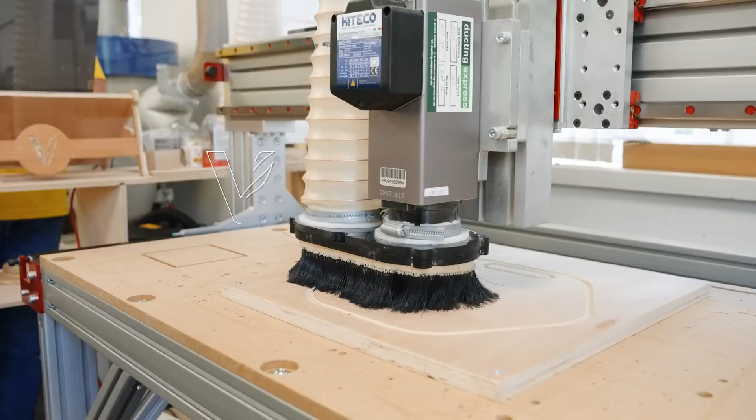For this project, I'm going to use Cut2D Desktop. Now you don't need to use that software for this project. Of course, if you have VCarve or Aspire, you can add all kinds of interesting elements to this. But I want this to be available for any of our core software customers.

Let's not forget that this is going to be a trial-friendly project. So if you're new to Vectric and you haven't purchased our software and you'd like to give it a go, and you think this project is exactly what you'd like to try to cut, then this file will be available for you to open up into the trial version of Cut2D Desktop, Cut2D Pro, VCarve Desktop, VCarve Pro, or Aspire, and you can save off the toolpaths and go ahead and cut them.

Another thing I want to say ahead of time: I'm going to give you 3 different files. You're going to have one set up for millimeters, based on 18 millimeter plywood. I'll give you another set up for 3/4 inch plywood, so you don't need to edit too much if you've got that on hand. And then I'll give you a plain file without me taking into consideration the thickness of your material, so you can edit that based on whatever you have kicking around the shop.

Unfortunately, just the first 2 files will actually work well with your trial version of the software, where the third one is more for people who have our full version, so you can go ahead and edit anything you want to. Okay, let's get that out of the way.

So here I have a fresh Cut2D Desktop open. Now, before we get too much farther, full disclosure: I've already pre-cut a sample of this. This was my original design that I was hoping would work out, and I could literally just copy it and give you guys the file. But I made some mistakes, and it was good that I made those mistakes so that I can point them out to you. First thing that's really important when it comes to a slot together project...

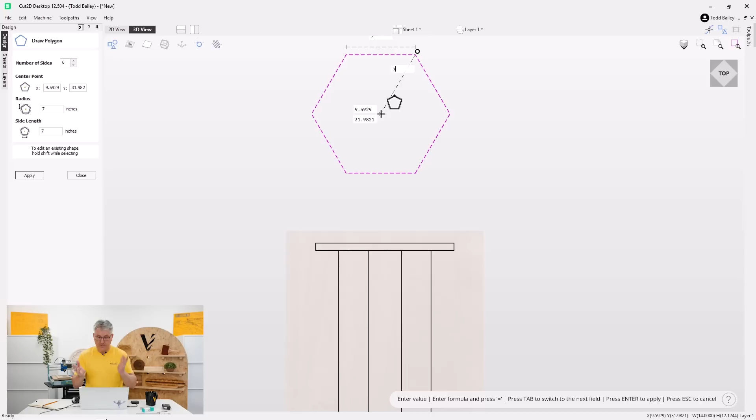Also, you'll see that we have those fields ready for you to type into. So if you didn't want to have that dialogue on the left-hand side already pre-filled out, then you can just do it here. So I could change this to be 6 if I wanted it to be, or I could change it to be 7, which I'm going to leave it at 7, and then just press enter, press escape, and there now I have that, and I can move that down to where I want it to be.

And we're just going to then center that left to right in my job so everything lines up perfectly. That looks good. Very happy with that. The next thing I want to do is think about the top of my stool. I don't like those real sharp corners on it. So one of the neat new features of version 12.5 is that we can create fillets right in our 3D view. So we're going to zoom in a little bit so we can see that.

Go over to my fillet tool. And without doing a whole lot in my dialog over here, I'm just going to hover over the corners that I'd like to add in a fillet. And if we zoom in with those current settings that we have, you'll see that it's going to show me what that fillet's going to look like even before I decide to go ahead and accept that change. I can go ahead now and click the normal fillet.

And once I've done that, then I can go ahead and use my arrow keys to go through the different fillet shapes. And as you see, the cursor will change as I go to be whatever fillet is chosen over here on the right-hand side, which is a really handy indication of what we're going to do. So let's go back to a normal fillet, and we are going to go ahead and hold down my left mouse button, and I'm going to drag it in.

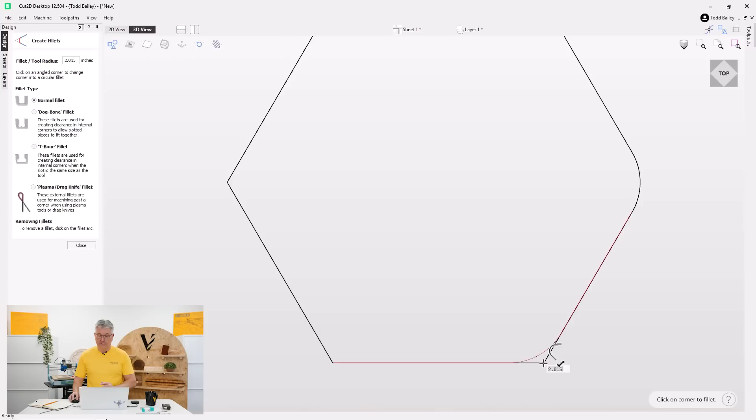And you'll see that now I can drag some arbitrary number shape that I want. So let's make this around 2 inches maybe. And once I'm happy with that, I can let go of my mouse. And that's great. And you'll see that my form is updated with that new dimension. So now I can just go ahead and click all of these corners that I'd like to have, and it will just go ahead and apply that fillet to those corners, and I'll get a nice round top.

Okay, so I'm happy with that. We can close that down. Everything looks really good there. Something to keep in mind that's important is now I need to adjust the width of this rectangle because it's not correct anymore based on the top-down view. And we can see that if I drag in a guideline. Another new thing in version 12.5 is I can put guidelines in my 3D view.

So you'll see that in the 2D view, normally you would drag it in from the rulers that are along the left and the top of your viewing window, but in this case, we need to right-click anywhere in the 3D view, and then we're going to go down to Guidelines, and we're going to insert a vertical guideline, and there it is right there. It's in the 3D view. I can drag it. I can move it back and forth. I can rotate it if I would like to, which is nice. It'll snap if I want to. So we're just going to go ahead and snap that there.

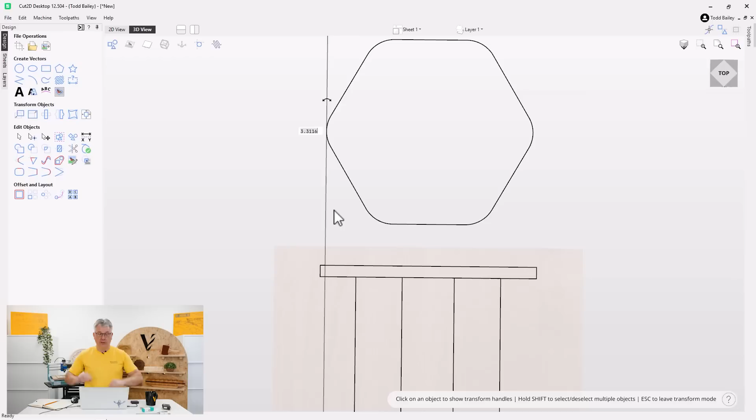And you'll see that the top of our seat actually got a little bit smaller because we've radiused that off. So we want to make sure that our side view is accurate so that we can place our legs in the right spot that we want them to be. So we're going to grab this rectangle, we'll hold down our shift key, and when I hold down my shift key, I can scale it in and out, and I can just go ahead and click that. That's great. Perfect. So now that is the right width of top that I have.

Now let's think a little bit about positioning these legs on our top, where we want them to be. This is totally subjective, and probably it's best that you test it to make sure that it's safe. As I said, I've already got one made, so I kind of have a good idea of where I would like them to be.

In this case, because I have this prototype available to me, I actually want to have these a little bit farther out to the outside edge. Although this is quite safe, and we've used it quite a lot in the office now, I would like to move them a little bit closer to the edge of the circle to give it a little bit more stability.

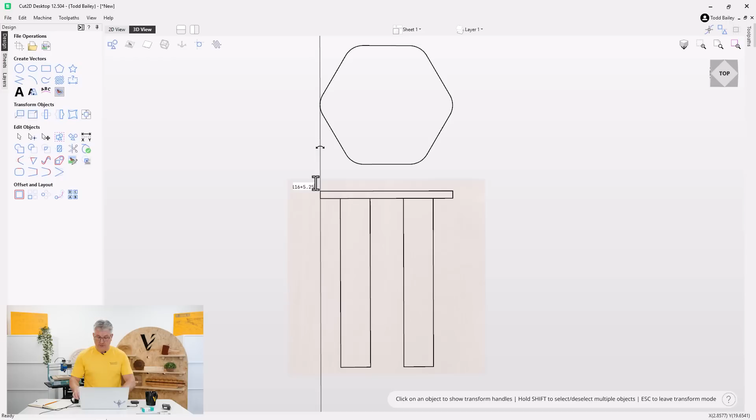So let's do that. What I'm going to do is use this guideline that I already have in place, and I am going to indicate where I like to have the inside of my leg to be. In my case, I think it should be about 5 1/4 inches from the edge of my seat. So if I select that guideline, I go into that field and I add 5.25 and then press equals and then enter. That's going to move that guideline over to where it should be.

That's great. So let's delete out the second leg. Let's zoom in and move this first leg over to where it needs to be. Then we'll zoom back out again and Control Shift and H again to copy that across our job. So Control Shift and H. And there we have where the other leg needs to be.

Now let's think a little bit about the shape of these legs. They look great, straight. Not probably. We want the bottom of them to be as close to the edge as we can, so we've got that nice sort of stability that we talked about. So here's some nice little tips that you can do when you're node editing in the 3D view. I'm going to add in another guideline just for fun here, insert one vertically, and drag it over so that it's there. So I've got a visual reference to where the edge of my stool is.

Now I'm going to grab both of these legs. I'm going to go into node mode, and then press H on my keyboard. As soon as I do that, you'll see there's that purple line down the middle of my job. If I have like nodes selected on both sides of that line, if I move them on one side, it's going to mirror the movement on the other side, which is great. So if I grab these 4 at the bottom and use my cursor keys now, you'll see that it's mirroring those to the other side. That's really nice and easy.

Next thing we want to do is grab all of those nodes, and we're going to turn them into Beziers, okay? And then we're going to grab these top 4, and use our cursor keys again to get us a nice shape at the top. Let's grab these 2 bottom ones, move them out. And there we have it. Nice looking stool legs, I think, to start out with. That looks great. Perfect. So let's go ahead and delete these guidelines out of here. I'm going to select that one and press delete on my keyboard. This one, delete on my keyboard, because I don't need those anymore.

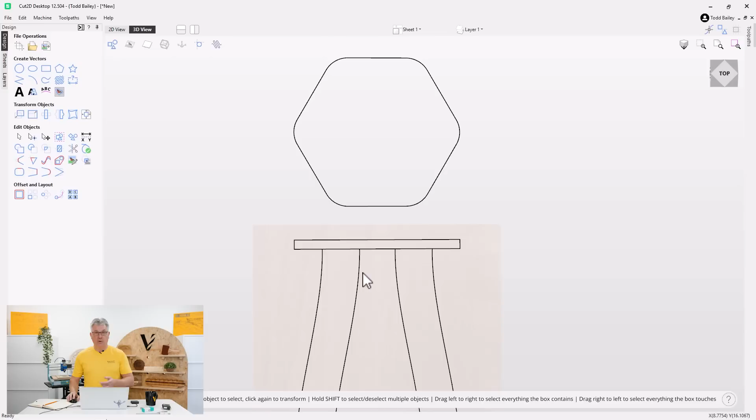Okay, so the next thing we want to think about is the pockets at the top and the tabs for our legs. So we're going to grab a rectangle, and we'll draw our tabs first. We're just going to draw a rectangle in here, and make this 2 inches wide and about 0.75 inches tall. Because it snapped to the rectangle I had already, it's happy, so I'll just press enter. Let's close this down. And now I'm just going to make it so that it will snap to the center of that leg there. That looks good right there. Perfect.

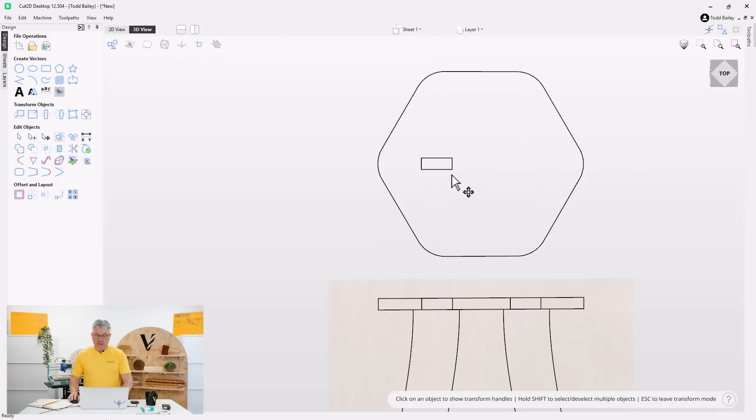And we are going to go Control Shift H. We'll copy that over there. So now we have our other one over there. That looks good. So we've got tabs now. The thickness of the top that's there, which again, we haven't measured to be sure that's right. And now let's take this one, hold down our Control and our Alt key, drag it up, and snap it right there where it belongs. And then we're going to go Control Shift H again, copy it across.

We'll grab both of those 2 vectors, hold down our Alt key and our Control key. That's going to copy it. But as I rotate it, it's going to lock it into those different increments so that it makes it a little bit easier to position. Put that where it belongs. And that's great. So now we have 4 legs with tabs cut. We have all of those slots cut at the top, or all those pockets. Then this should fit together and we should have a stool.

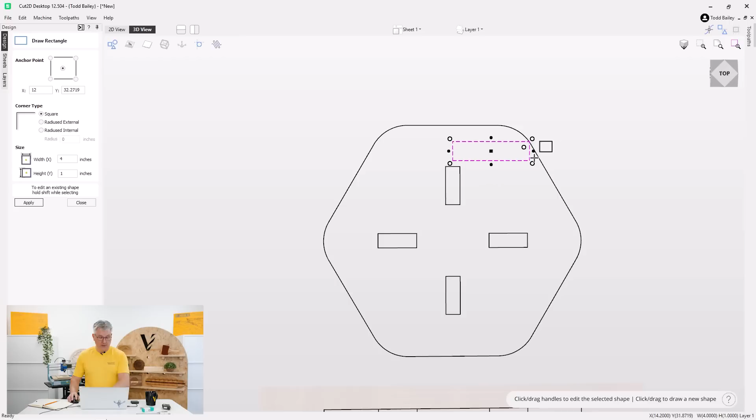The last thing I'd like to do is to add in a rectangle here for a handle. So we're going to grab the rectangle tool again, and we're just going to draw a rectangle. It's going to be 4 inches. We'll tab over by 1 inch. That looks great. Press enter. Escape out of that. We'll grab that, and we're just going to eyeball that in here somewhere. It doesn't need to be perfect.

The only thing I need to think about is that this is going to be a hole. So when I stick my leg up in the bottom of this, I don't want to be able to see the lip of the edge of my leg kind of creeping in there. That might look a little funny. So that looks pretty decent like that. Now, because I like the shape to be round, I can select that. Because I'm in the 3D view, I can grab this handle right there, just drag it in, and it will radius off all those 4 corners for me to make a nice handle.

Now that's pretty much all that we need right now for our design. The next thing we need to think about is actually what's going to happen when we cut it, and the geometry of our tool, the thickness of our material. So let's go ahead and fix all that. So I have a cut off of the material that we're going to use. It's a nice looking piece of plywood. Well, I say nice looking. It's not the best quality plywood in the world, but it'll do the trick. And I can use my calipers to get a nice accurate reading of how thick this is.

And that's really important. Again, reiterating what I said earlier, if you don't have a nice accurate measurement, then your pockets aren't going to be wide enough or tall enough, depending on which way you're looking at them. And your tab won't be long enough or it'll be too long and stick out the top or the side of your slot together project. So let's go ahead and change that right now. The top of our stool and the width of our tabs are all set to be based on a 3/4 inch material. We need to fix that.

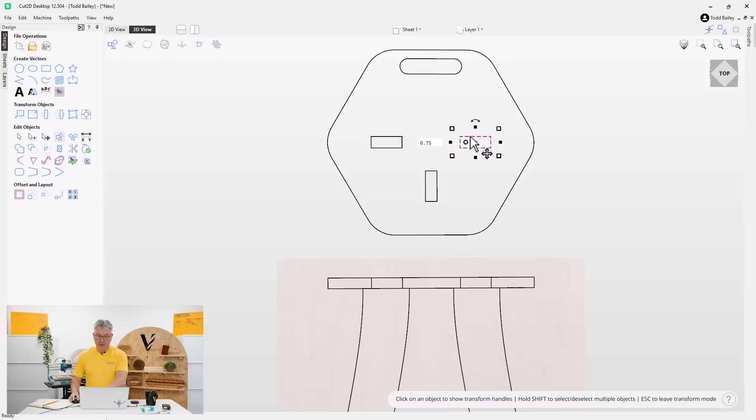Now the next thing we need to do is to adjust the actual slots here at the top. So let's delete out these pockets, and we're going to go back to this first one. And we are going to, again, change this to be 0.7. Press enter. I now need to make sure that it is still centered within that top shape. So we're going to go over to our alignment tools. We'll center that. We'll close that down.

Let's grab this one, and we're going to hold down Control, Shift, and H, copy it across. Again, Control and Alt, move those around. And there we go. Now we've corrected all of those errors that we made based on the fact that I thought my original material was going to be 0.75 of an inch thick.

Now the next thing we need to think about is the geometry of our tool. We're going to be using this 1/4 inch compression cutter. A compression cutter is important because it's made so that when you cut through material, you're going to get a nice surface finish and a nice underside finish. That's because the bottom bit of this bit is an upcut bit and the top bit is a downcut bit. And we'll talk a little bit more about that later on in this project.

But for right now, the most important bit is looking at the end of this tool. It's round. Any internal corners that we cut are going to end up having a radius inside. That means that anything that we want to fit into those pockets that we're using an outside cut, which would mean they're nice and sharp, is not going to fit. They're going to get hung up on those radius corners. So to get around that, we're going to do a couple things.

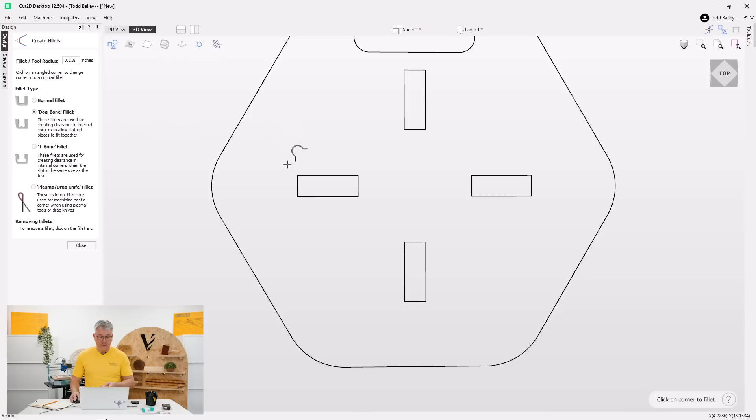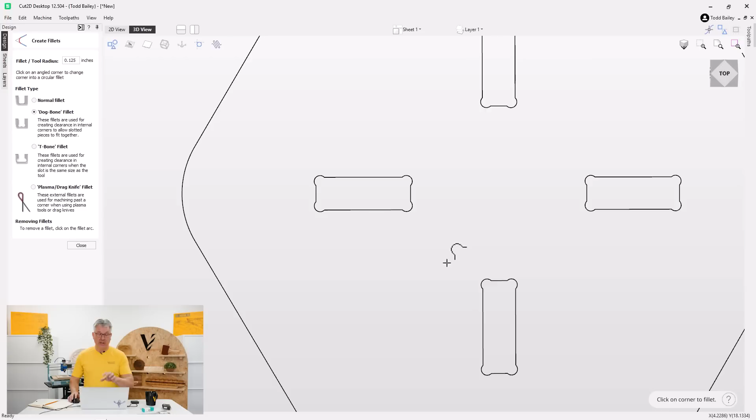The next thing we want to do is take a look at the pockets up top, or the slots. And we want to do exactly the same thing, except we want to make sure that we put them on the outside, and we're going to get the same radius at 0.125. Oh, you'll see that for some reason I didn't have that set quite right. So we'll go back and correct those, it'll just take a quick second. Just be careful when you do that you don't drag your mouse. You just click down, because if you drag it, it's going to update your radius to be wrong. So just double check that to make sure that's correct.

Okay, so that all looks good now that I've fixed all those. I'm happy with that. Let's just recheck these guys down here at the bottom to make sure they're right. I'm just going to re-put those back in again. I'm not confident that I didn't move the mouse like I said. Perfect. That looks good. So those are all updated with the 0.125 inch radius. Great. So we've taken into consideration everything that we need to. So let's go ahead and set up our sheets now.

Now I'm going to set this up so, like I had said, you can use Desktop for this. So each of these sheets is not going to be any bigger than 24 inches. So you can cut this on your machine if you have the capacity to. So one of the other nice new features of 12.5 is that we can duplicate sheets, which makes life really easy. And not only will it duplicate your toolpaths, it'll duplicate your vectors, any 2D geometry you have, or any 3D components onto a brand new sheet. In this case, I don't have any toolpaths or 3D stuff, but you still get the idea of how you can use it.

So let's go over to our sheets. I'm going to right click on sheet 1, and I'm going to duplicate that. Now while I'm here, let's take a look at our 2D view first of all, so we can see there's a duplicated sheet there. We're going to go ahead and rename these just quickly so that we can keep track of everything. So we're going to call this design sheet, and then we're going to call this other one legs, because this is where we're going to put our legs on here.

Okay, so we're going to go to that sheet there, and we're going to delete all the stuff we don't need. I don't need any of this. Don't need that, and I don't need this. I'm going to keep one of those, and I'll tell you why in a second. Don't need this leg either, because all these legs are exactly the same. I'm just going to go ahead and drag that over there. Now hold down my Control and my Alt key. I want to make 4 of these, so I'm just going to drag them across, sort of eyeballing the position they need to be in. That looks good. And then we're going to drag this shape down.

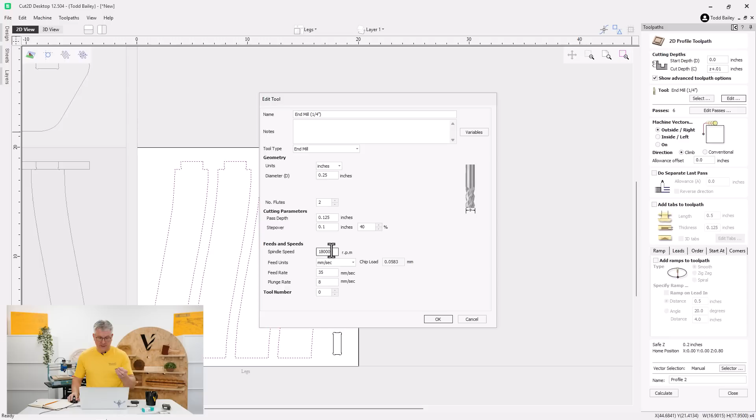We're going to use a 1/4 inch end mill, and we're going to just check that to make sure everything is fine with that one. It's 1/4 inch end mill. We've got 2 flutes on it. So like I said before, a compression cutter is just an end mill with two parts to it. The short bit, the little bit at the bottom, is an upcut bit, and the other part of the cutter is a downcut bit. So we're just going to make sure that our pass depth is set to 1/8 inch or 0.125. That's great. Everything looks really good here, so we're going to click OK.

The trick with these cutters is that your first pass, before it actually engages with the side of your part, you want to make sure is down the depth of that upcut part of your bit plus a little bit, so that you're below the surface of your material. You're not pulling up that surface, you're really just pushing it down using that downcut portion of your bit. Then when you come out the other side, the upcut bit will be pulling up the bottom of your material and giving you a nice clean bottom finish. So you have a nice bottom and a top finish using this neat new cutter.

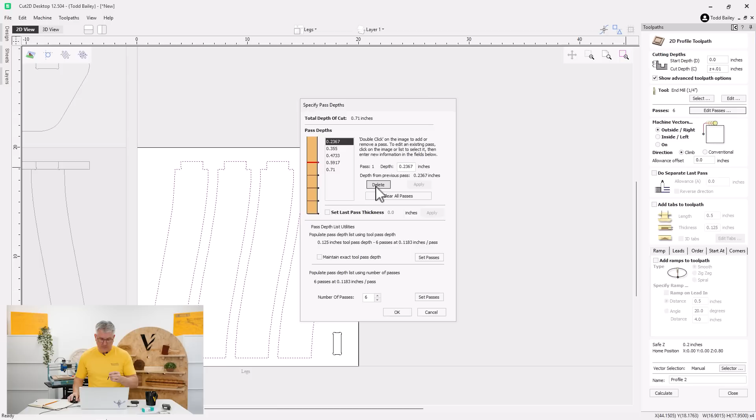The thing you need to be sure you do is change your pass depths. Each pass depth of this tool is going to be set to 1/8 of an inch, but we want to actually remove some of the passes out of here until we get to the pass that's a little bit more than that 1/4 inch part of my bit. I've measured it, it's about 1/4 inch, so I'm going to delete those first two passes. It's going to plunge in right down to 0.355 of an inch and then start to do its work. That way I'll have a nice surface finish, which will be great, perfect in this case. We're going to click OK.

Now, if for some reason you go in and change anything like your step down of your bit, or your material thickness, then you need to go in and check those pass depths, because we'll reset those back to an equal amount. So you need to make sure that is correct before you click calculate at the bottom. If you don't, then you're going to end up totally not using the benefits of this compression cutter.

So that's really good. We're going to cut outside the line. We're not going to use any allowance offset for our legs, we're going to leave it just as it is. We'll look at that a little bit later on. We're not going to do a separate last pass. We're going to add in some tabs. Those lengths and thicknesses look good.

Let's edit our tabs. We're going to put in 4 tabs for each vector, each closed vector. In this case, we're just going to let it do it because it does exactly what it needs to do. Those are exactly where I want them to be. That's perfect. Let's close that down.

Now we might want to consider using ramps and leads. A ramp is, instead of your tool plunging straight down into your material, it's actually going to slowly ramp into your material, which is going to be quite helpful with your tool, especially if we're plunging in more than the diameter of my tool, which isn't always the best case. So to be on a ramp in gives it a nice sort of gentle kind of cut into it. We're going to go ahead and ramp in a straight smooth ramp, a distance of about 1/2 inch, which I think will be enough.

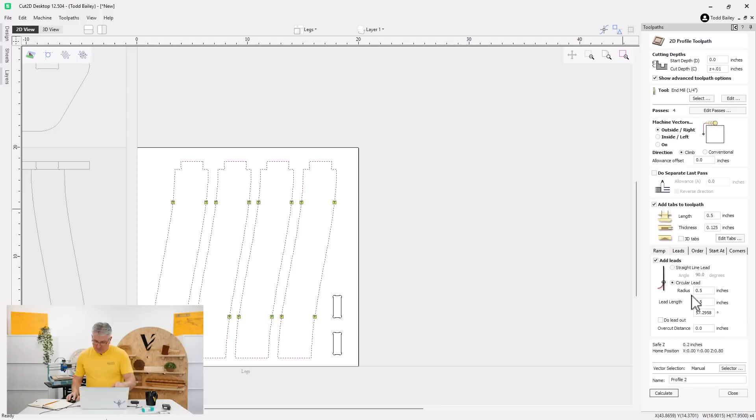That all looks fine, everything looks great. So let's go ahead and calculate that. It's going to give me a warning. I know I'm going to cut through my material, that's all right.

Let's quickly go ahead and preview those tool paths, and you'll see that there are our ramps and our leads at the top. If we turn on our tool paths, you'll see them right there, the light blue lines, and that's going to look great. We will throw up a warning if we can't fit your ramps or leads in there. We might need to either cut them short or remove them totally. That way you can be ensured that you'll have a nice part in the end, but you may not be able to take advantage of those particular features unless you modify the parameters that you've used. That's great, so that's perfect.

The next thing we want to do is turn back on our 2D vectors, and we're going to talk about these two little test pockets. We want to cut these legs out, break one of them out, and test fit them into one of these pockets so that we can reflect that pocket allowance to the top of our stool.

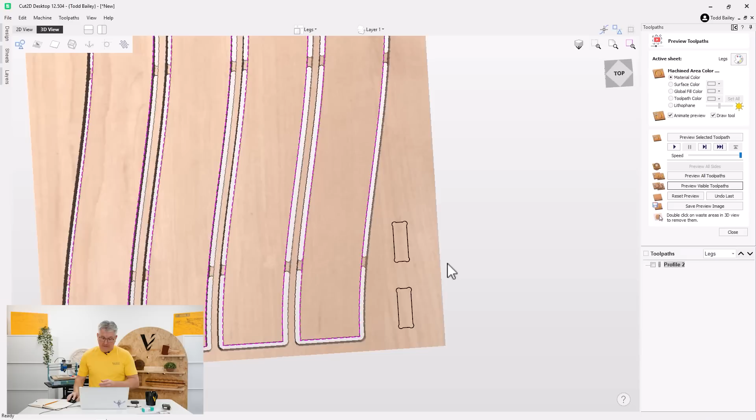That way we're sure our legs will fit in properly. Let's close this down and select this bottom slot. We're going to make this a pocket. You can use a pocket or a profile, it's up to you. I think when I actually cut the finished one, I used a profile toolpath instead of a pocket, but it's up to you, whatever you feel more comfortable with.

We're going to start at 0, go down Z plus 0.01, and use a 1/4 inch end mill. We're just going to check that to make sure everything's safe and appropriate. If I make any changes here, using that edit button, it'll only reflect within this toolpath—it doesn't update my tool database. So if I've made changes and I like the results on my CNC machine, I may want to go back to my tool database and update that from these numbers. That all looks great, so we'll click OK.

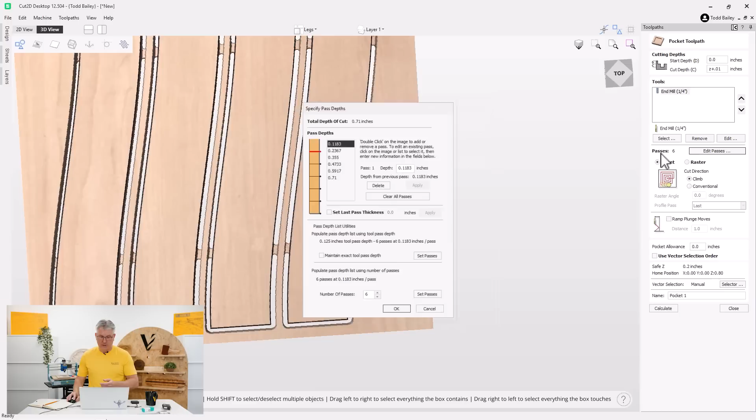Again, we need to make sure we edit those passes. We're going to delete out those first two, start at 0.355 of an inch, click OK. Offset toolpath is fine, that's all good. We're going to make sure we use a pocket allowance.

Now this is the magic number—this is where we're going to make these pockets a little bit bigger so we can be sure that, instead of jamming that plywood in there and chipping it to pieces, we can just put it in nice and easy. Maybe with a mallet, just gently, or we can slide them in and glue them in place if you want to. We don't want too much wiggle room—we want exactly the right amount of wiggle room.

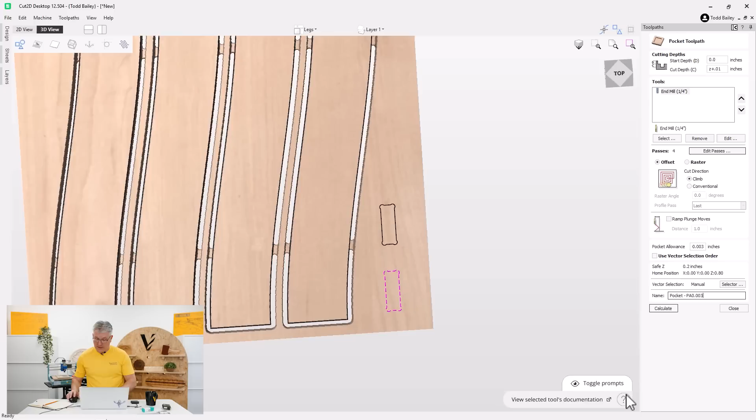So we're going to go with our first one, 0.003. And then we'll update our name here to be pocket allowance—I'm going to call it PA 0.003—and then we'll calculate that. Again, we're going to get a warning that it's going to cut through our material, but that's not a problem at all.

Let's go and preview that visible toolpath. That looks really great. We'll show that and go to our 2D view. What's nice in our 2D view is if we have turned on our solid toolpath preview, we can see that we're overcutting that line just by a little bit, which is perfect.

That's what we want. Now the next thing we want to do is do the same set of toolpaths and instructions for this other pocket. So let's go back to our 3D view, turn back on our vectors. Let's right click on this toolpath—we're going to duplicate this toolpath.

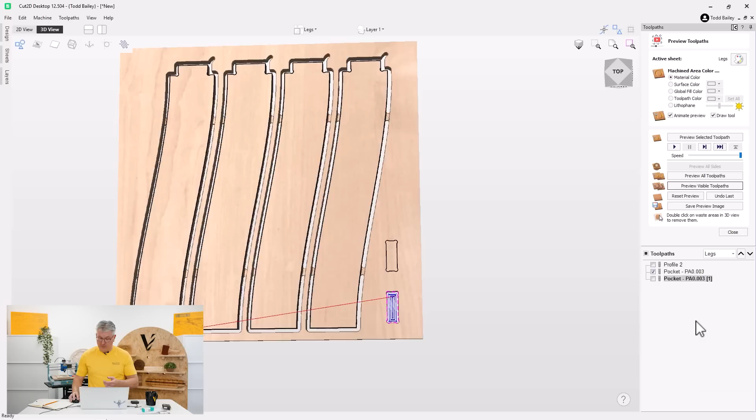When we open up this duplicated toolpath, we're going to select this new vector. All the settings are exactly the same as before. We're just going to change this last pocket allowance to 0.005, and change our toolpath name to 0.005, and we'll calculate that. We'll press OK and preview that visible toolpath.

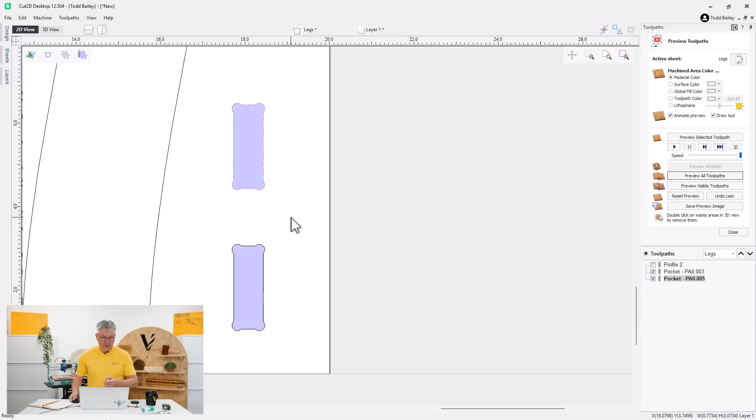We'll preview all those toolpaths then, since I just reset that by mistake. Let's go to our 2D view, turn on that solid preview again, make sure we have those toolpaths selected, and zoom in to have a peek. Remember that 0.003? That's it there. The 0.005 is a little bit more, and you can see the difference.

So once we get this all done and figure out which pocket allowance is the right amount, we'll reflect that in the top of our stool. That's all we need for the legs. Great, perfect—let's close this down.

The next thing you want to do is now think about the top. So let's double click on the sheet number on this sheet over here. Let's go ahead and right click on this, and we're going to rename that design. We'll press enter—now we've got the name properly set.

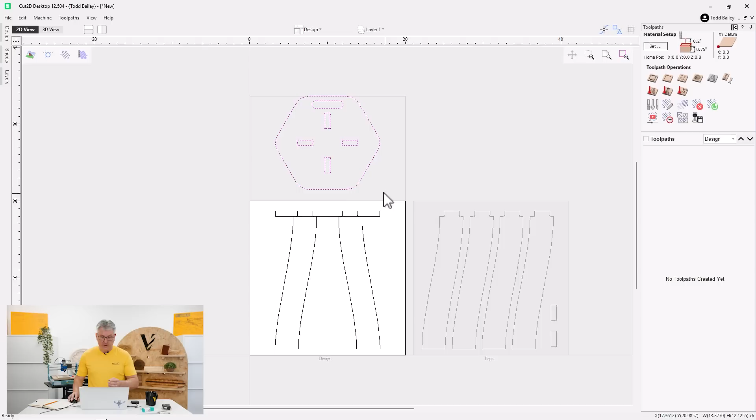Let's right click. What we're going to do is select those vectors, right click, and copy these to a new sheet. This is going to create a new sheet. We're not going to copy all the rest of the stuff off of there.

Let's go over to our sheet manager. We're going to go to this new sheet that we created, select it, and edit that. We're going to change the thickness of this to be 0.70.

Now I don't need a full 20 by 20 sheet for this. We're going to make it 15 by 15. Notice instead of updating my thickness through my material setup in my tooling, I'm doing it here in my sheet manager, making sure I have the right sheet selected. That all looks good, everything's fine.

Let's just click OK. It's just warning me that some of my toolpaths will cut through - that's not a big deal. The other toolpaths, it's just checking for me. Let's just center that into my job again.

Now we can go ahead and get those toolpaths all done up. Let's check our material setup again just to be sure everything's fine. Everything looks good there, perfect. That's no big deal - it's just telling me that some of the toolpaths I've already created are going to cut through my material, but we already know that's going to happen.

That's perfectly fine. First thing we're going to do is think about how I want this to cut out. I'm going to use this 60-degree V-bit to create a faux chamfer around the outside of this stool. That way it'll give a nice soft finish, and the handle will feel good in your hand when you're trying to carry it around. It won't have too many sharp edges.

If you have VCarve Desktop Pro or Aspire, the chamfer toolpath is built in, so you could use that instead. But we're just going to literally run this V-bit along a line using a profile toolpath. So let's grab those two vectors, hold down my shift key, and choose a profile toolpath. We're going to start on the top of my material.

We're going to go down 0.25 of an inch, that's 1/4 inch into our material. Let's select a new tool - make sure it's hardwood - we'll select that 60-degree V-bit. We're going to edit those settings in there, making sure everything is right for this material and machine.

I'm going to change this to 18,000. We're going to make sure we change this to millimeters per second, change this to 35, change this to 8. We don't have a tool changer, so we're going to take out that tool number. That looks good, everything else seems good, so click OK.

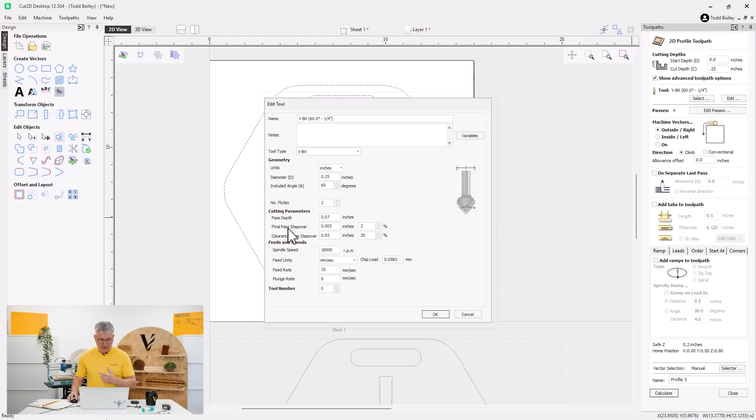It's going to take 4 passes - that seems to be a bit much. So let's go back into our tool for a second and change our pass depth to be 125. That's probably lots, probably good for this tool. Press OK - that's 2 passes, that's even better. We're going to go on that line.

All this is totally fine, we're not cutting through our material. We're just actually going to profile that, and I'm going to name it V-bit, and we'll calculate that. Then we'll preview that visible toolpath, and that looks really good - that's exactly what I was hoping for.

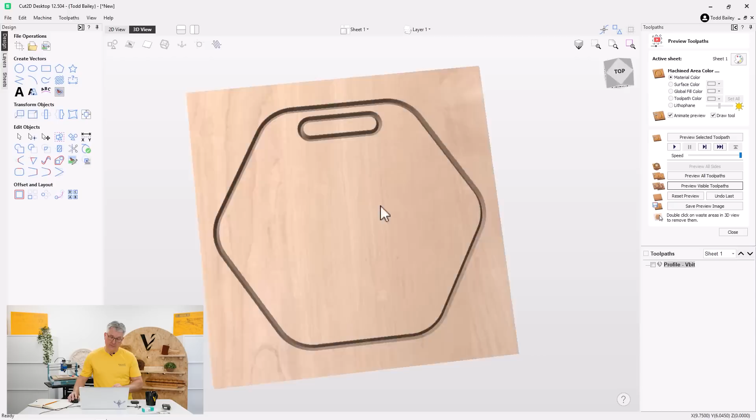Okay, let's turn back on our vectors again. And now let's pocket out these 4 in the middle based on what we had learned from the last test fitting that we have. So let's grab those right there, do a pocket toolpath, start at 0. We're going to go Z plus 0.01 of an inch, and use a 1/4 inch end mill.

Let's just edit that to make sure it's correct - that's exactly the same tool we had before, that's great. Edit our passes - again, really important to do that. We'll delete out these top 2. Click OK, we don't need any offsets. Fine, ramp and plunge moves - nope. We can use the pocket allowance - remember, this is where we want to put in that number.

So minus 0.005. That's the one that's going to fit. I know that because I've already done it. That looks good. And we can go ahead and calculate that.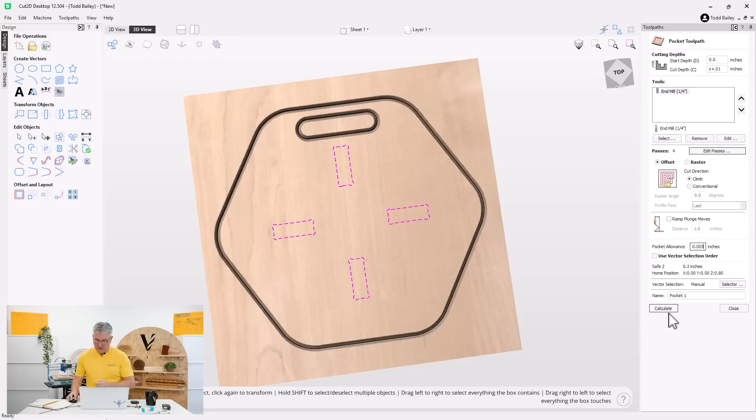Now, in this case, I know I skipped over the ramp and plunge moves. I could add in some ramp and plunge moves. Again, that way, when I plunge in, it'll actually be nice and gentle on my tool. I know with my machine that we're using that I don't need to worry about that too much, but that is something you might want to consider, but I'm just going to leave that out for now. We'll calculate that. It's going to cut through my material. I know that. Let's preview that visible toolpath.

Great. And the last toolpath we need is a profile toolpath to cut this whole thing out. So let's go to our profile toolpath. Let's turn back on our vectors. Select this vector here, hold down my shift key, and this vector there. Okay, we are going to select the 1/4 inch end mill from our tool database here.

We're just going to quickly go in and edit that to make sure everything is all right. So we're going to go a little bit deeper every time. Turn up our spindle speed to 18,000 RPM. We can make that 35.8. Now that's good. So let's click OK.

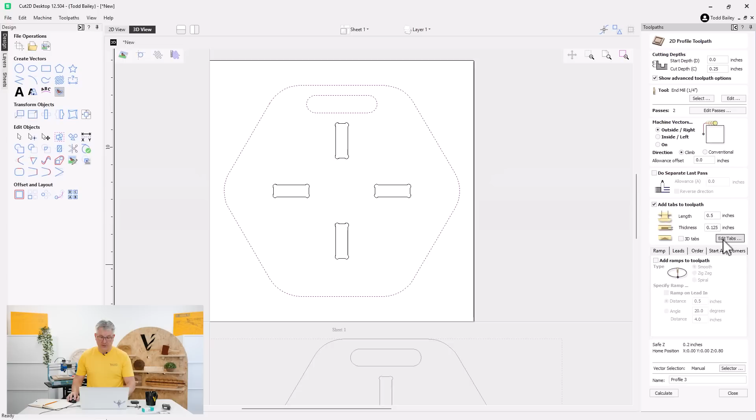We're going to go outside that line. We're not going to do a separate last pass. We're going to add in some tabs. Those are perfectly good size. I want to manually put these tabs in because I want to have control over where they belong. That's where I like them to be.

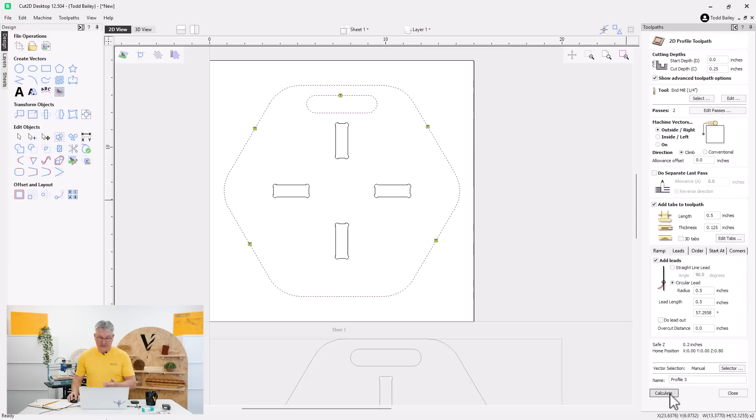Let's close that down. We're going to use ramp and plunge moves like we had set up before, and leads as well. That's great. Ramps and leads. Everything's happy there. Let's calculate that. Now this is where that warning came up. It says that it's going to clip some of those ramps and leads, and that's okay because those are probably the ones that are in the handle that aren't going to fit. So we're just going to say, okay, that's not a big deal. And let's preview that visible toolpath.

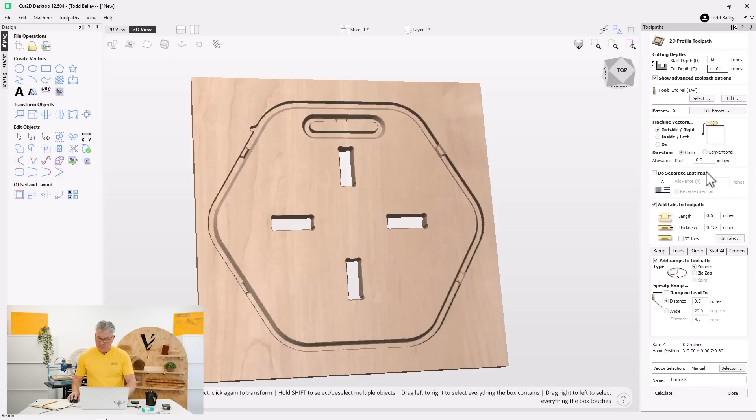Oh, we didn't cut all the way through the material, so we need to change that. See, I didn't do my cut depth. This is a beautiful thing about our software, that I only would see that because our previews of our toolpaths are accurate. So let's just change this up really quick to be Z plus 0.01. Okay, everything else is fine. We need to edit those passes. We're going to delete out those first 2. Click OK. Everything else should be good. We're going to get those same warnings. Undo that last one. Let's preview this visible toolpath.

And there we have it. There are our tabs. You can see that those ramps and leads were removed from this part of it because it won't fit in there. But everything looks good. I'm happy with that. Now at this point, I can go ahead and save off my toolpath. I've already done that. I've already cut a finished part. So let's go ahead and take a look at some footage of that being cut.

I really like the way this turned out using all the stuff that I learned from that first shop stool that I made. Everything fits together nice and tight, thanks to me making a good accurate measurement, making sure I changed up those pockets so that these legs fit in really nice, and changing the length of those tabs that are on the top of these legs. It's really great, and it's really highly customizable.